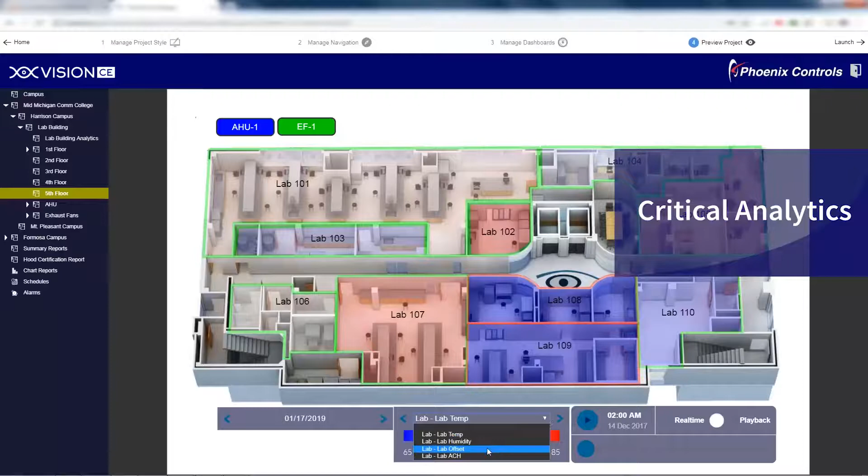This comprehensive tool supplements your facility's existing building automation system and provides full web-based operation. With Vision by Phoenix Controls, you will enjoy features such as a full suite of powerful and customizable real-time reporting tools, and critical analytics at every level to help evaluate and maintain proper building operation for facilities, safety, and energy management.

Easy to read and navigate UI, providing detailed data on air change rates in real or historic timeframes. The ability to customize the visuals to represent specific campus, building, floor, and room specifications.

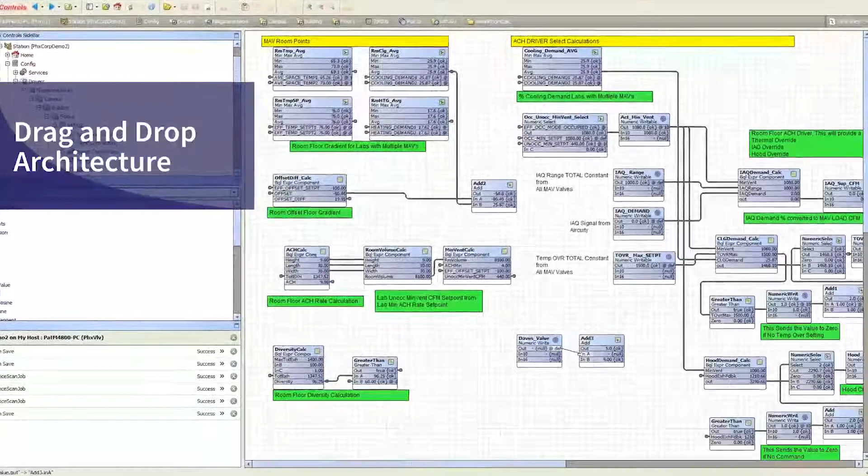A drag-and-drop architecture builder, plus many pre-built mechanical templates, makes for easy setup and updates as your facility needs grow. Custom reporting to help provide certification management, trend analysis, and energy efficiency tracking information, and more.

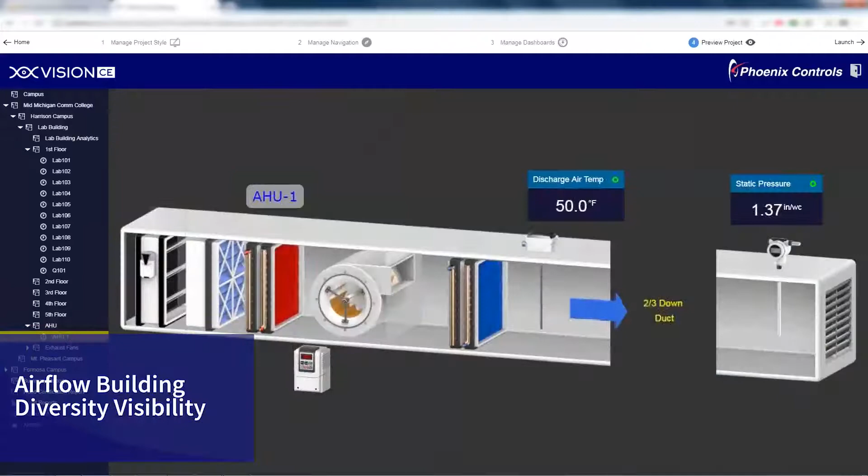Review, report, and make equipment decisions with airflow building diversity visibility. Information feeding into Vision is not limited to Phoenix Controls equipment.

For your critical room control system needs, Phoenix Controls is simply the best in the business. You may already know the quality and reliability of our Venturi valve system. Well, now the innovative Vision analysis tool is just one more reason to look to Phoenix Controls.

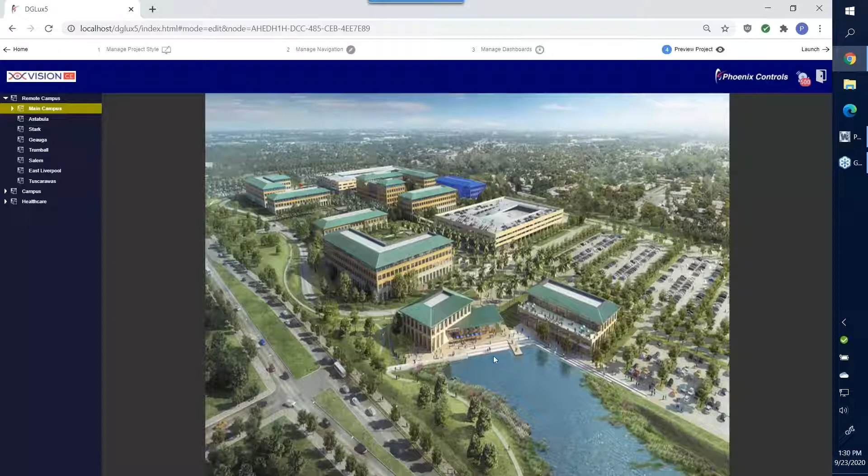This is just another example of that. Essentially you would go into a building, and in this case, we'll dive further into the lab floor.

This is unique in a lot of ways. As we said, this was meant to be an additional supplement to your building automation system. It has many of the same features and capabilities with additional features uniquely designed for the critical spaces.

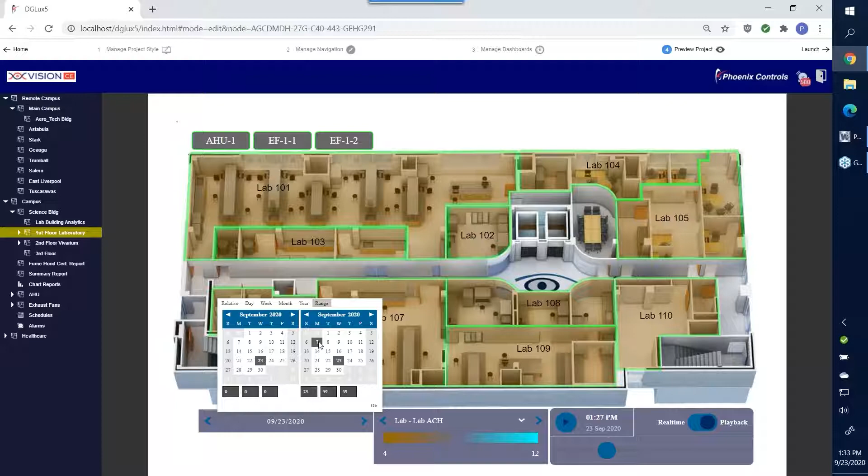Most systems can do historical information, but the difficulty is always how to manage it. Every floor plan also has the ability to independently select the range of date you're interested in, whether the last year or month. If you had 2, 3, or 4 years of information stored, you wouldn't have to worry about parsing through it. You just select the areas you're most concerned with, maybe an event that happened earlier or later in the week, then view that area and use the DVR to cycle through it, looking for a particular hotspot based on temperature colors.

There are additional gradients that can be added. These are just some of the ones you'd primarily see within a lab space. Any of these mouse-over functionalities gives you the current value. If I switch to temperature, for instance, it'll show that it's at 60. Here we have some warmer ones, and that's 93. So it gives you an idea of how the information can be viewed.

In addition to what we typically do with Phoenix, we know it's important to have information on the air handling unit and/or exhaust fan systems serving these critical spaces. This additionally allows us to bring in information, either hardwired or integrated, so we can look at the critical variables that are key for good control in these spaces.

This is specific to analyzing how these spaces are operating, giving you quick, easy hyperlink moves to go look at the types of information that are critical.

Here we have an additional history where you can view to make sure discharge air temperatures are maintaining their set point. In this case, the yellow is 55, and we can see it's not great control. We may not be doing the control, but we're just verifying that it's not becoming an issue further down in the lab space, as well as static pressure, so we have a stable means of control. You'll see these graphs and charts throughout this presentation.

All charts have an easy button that lets you export into a CSV file, so that information can be easily sent to others you may need to involve in troubleshooting and fixing potential problems. All of the screens allow you to zoom left to right to zoom in, do flyovers to look at specific pieces of information, and easily double-click back to get to the main screen.

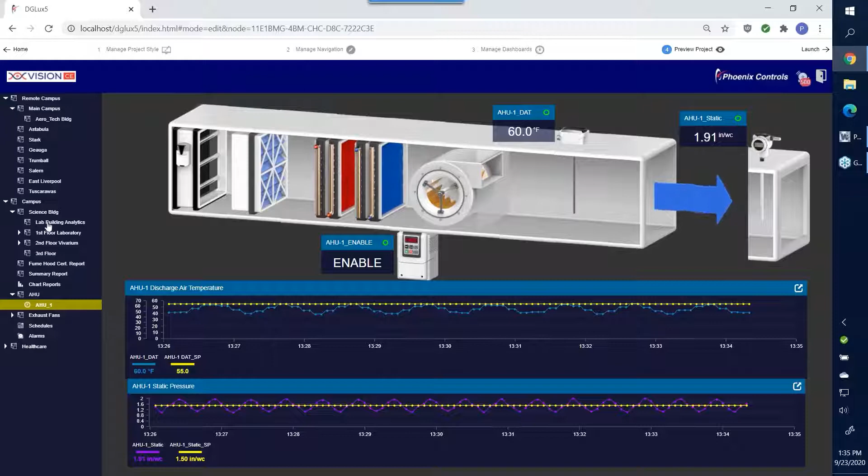Again, this was an example of what you might look at with an air handling unit, going back to the floor plan. And then you have multiple examples of what you might do with a particular air exhaust fan system. Additionally, if enabled, you could even create the ability to manage those systems by turning them on and off.

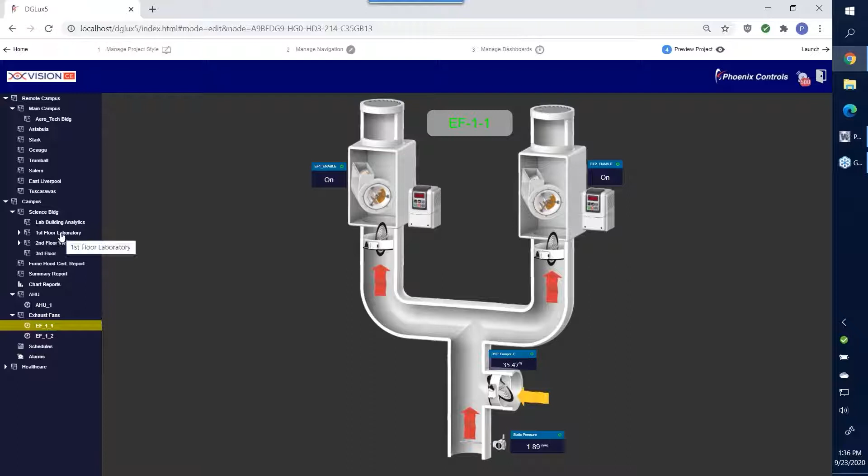And seeing damper positions and all the things that you might see on a normal system. But again, the key is that it's all in one spot. It's kind of, when we're trying to look at these critical spaces to diagnose them, we want to know, are they operating and are they operating correctly?

Now, let's say you've done an analysis and you see a problem you want to investigate. All of these particular spaces, you can dive into a template, which gives you a lot of information associated with the Phoenix system. We'll just run through these briefly, but in most cases, as far as the real estate within these templates, the top portion shows you information related to temperatures, with charts and histories associated with the variables that would allow you to diagnose what's happening there.

Then we have the pressure relationships of the points associated with maintaining pressure, charts as well as the points next to them, air change rates, associated points. And in this case, because we're looking at a lab where you might have fume hoods diversity, if you're not familiar with that term, contact your local Phoenix representative, because there's a lot of benefit in understanding how your building's operating from a diversity perspective.

And then you get into the individual valve associated with these spaces. Now, these are unique in that when these templates are built, they can self-sustain. So as you add and remove valves, these templates automatically link with the associated points for those particular devices as you install them. Here's an example where we have a fume hood, a lab space with 4 fume hoods.

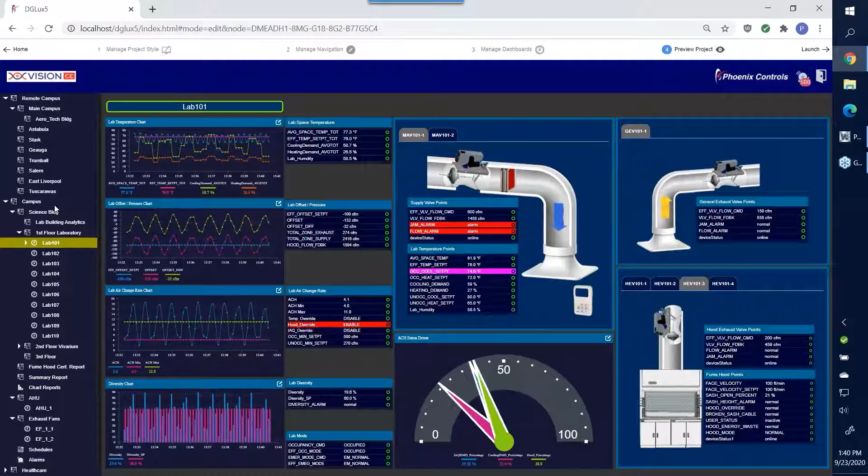You can zoom in, and all of these can export out to CSV files for your use. Within this system, we have an additional fume hood certification report. This goes out and analyzes all of your fume hoods to determine if any are in alarm, and if they are, you can make the associated notes.